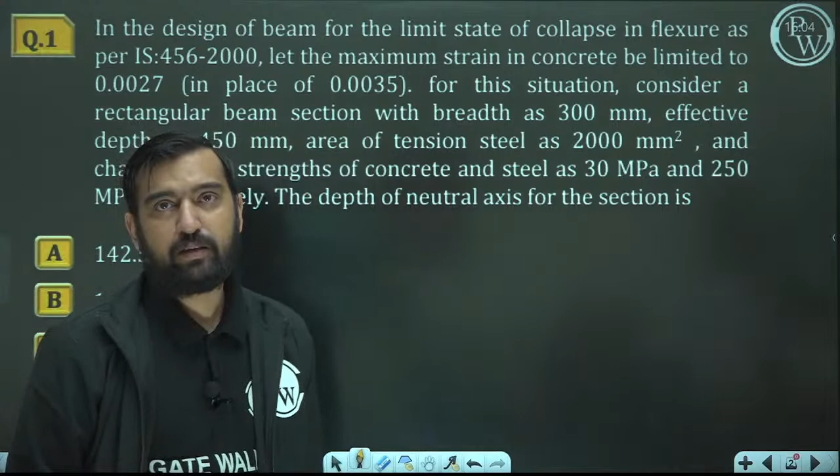Here is question number 1 on your screen. It says that in the design of a beam for the limit state of collapse in flexure as per IS 456-2000, let the maximum strain in concrete be limited to 0.0027. We know that originally, as per IS 456-2000, it is 0.0035, but instead now they have taken strain equal to 0.0027. For this situation, we have to consider a rectangular beam section whose width is 300 mm, effective depth is 450 mm, and tension steel is 2000 mm square. Characteristic strength of concrete is M30, means 30 MPa, and for steel it is Fe250, 250 MPa. Now they are asking, what is the depth of neutral axis?

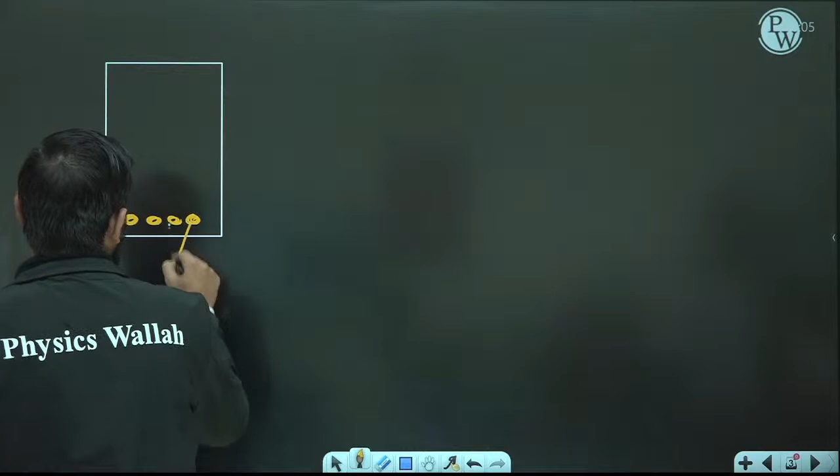So what they are saying is, we do have a rectangular section, and let's suppose we are having some area of steel. This area of steel is 2000 mm square. M30 is the grade of concrete and Fe250 is the grade of steel. Somewhere here let me have a neutral axis, and the strain diagram here would be like this.

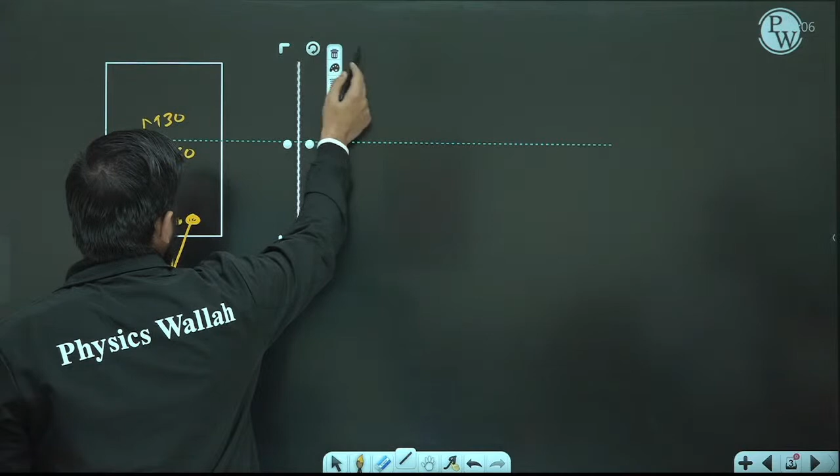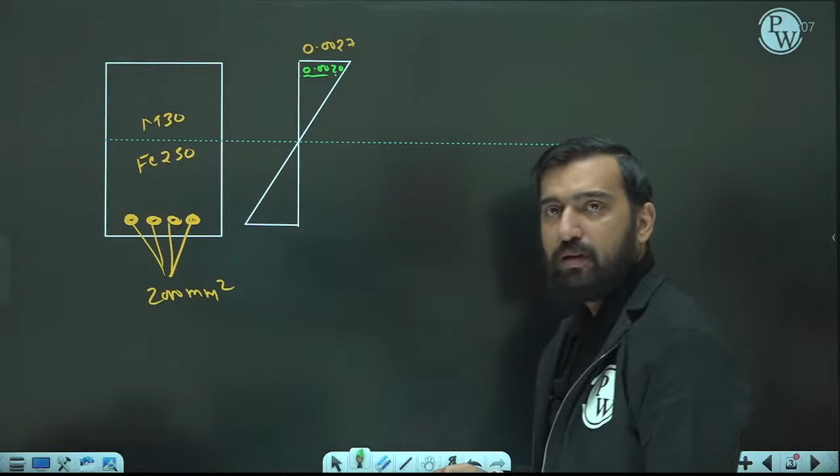So all other information we will keep the same; whatever alterations have been given, only that we are going to incorporate here. So no need to think much, only the changed thing I am highlighting here. And we know that the stress-strain curve for concrete is parabolic up to a strain of 0.0020, and for the remaining portion it is constant. So my stress-strain curve will look like this.

Now we know that for this portion we are going to have a constant stress of 0.45 FCK, and the rest of the things are same. So let me highlight here the stress, and that is equal to 0.87 Fy. Now friends, I need to find what is this rectangular block out of the total depth of neutral axis. Let's suppose if this is the total depth of neutral axis, then out of this total depth, how much fraction is under constant stress of 0.45 FCK, and how much fraction has a parabolic variation. So what can I do?

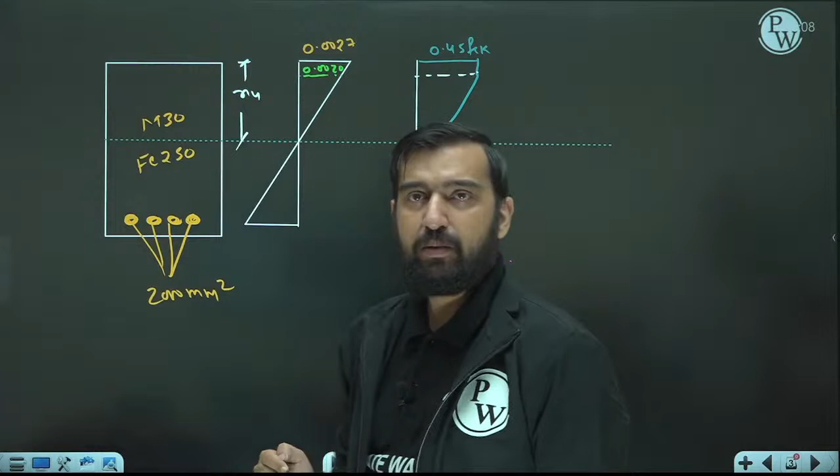If this distance is Y, then from the concept of similar triangles, I can write that 0.0027 upon XU is equal to 0.0020 upon Y. So Y is equal to 20 by 27 of XU. So this value is going to be how much? It is 0.741 of XU. Now what about the remaining depth?

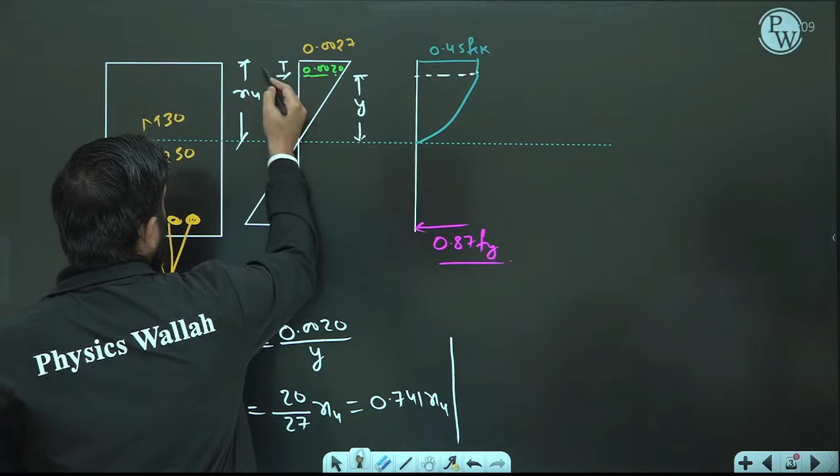So let's suppose the remaining depth is Y dash. So Y dash is equal to 7 by 27 of XU. So Y dash would be equal to how much? I hope you guys are keeping your calculator with you. It is 0.259 of XU. Now we have to find the neutral axis.

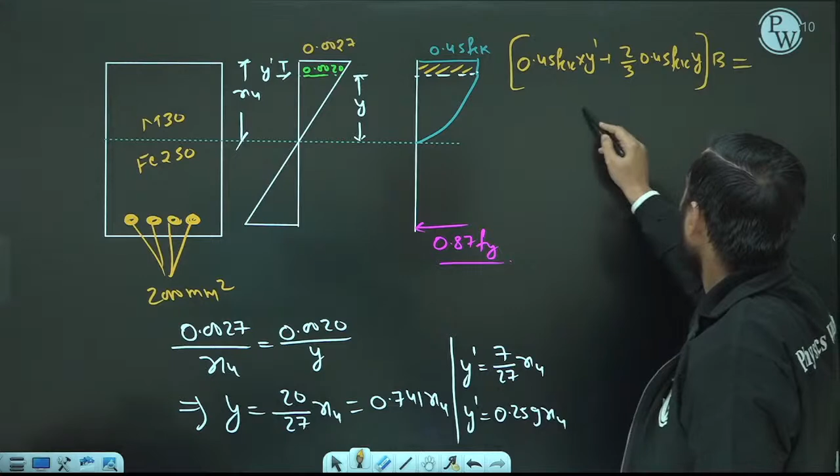How can we find the neutral axis? Just by equating compressive forces to the tensile forces. Total compressive force in concrete would be generated due to this stress portion, whereas the stress on steel is constant. So if I write the compressive forces equation, what is this area? This area would be the rectangle area 0.45 FCK into Y dash, plus this parabola area, which is a major portion of the parabola, 2 by 3 into base into height. So this entire area would be multiplied by the width of the section. This has to be equal to 0.87 Fy into AST.

So now solving this equation, we get 0.45 into FCK which is 30, into Y dash which is 0.259 XU, into B. B is given to you as 300 mm, plus 2 by 3 into base into Y which is 0.741 XU.

This is equal to 0.87, Fy is 250. Area of steel is also directly given to you. So my friends, on solving this equation, you would be getting here 142.66. So Xu on solving this equation, it is coming out to be 142.66 mm. Let me check with which option it is matching. 142.66, so it is best matching with option number A. So option A is the right answer.

Okay, so I hope no doubts are there.

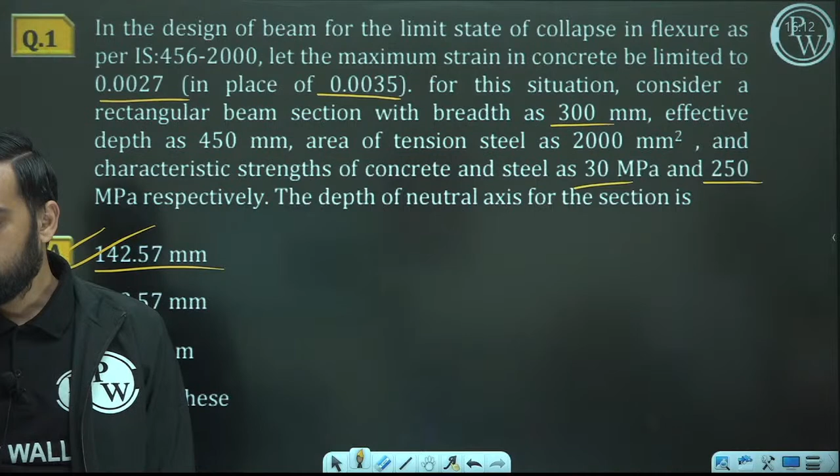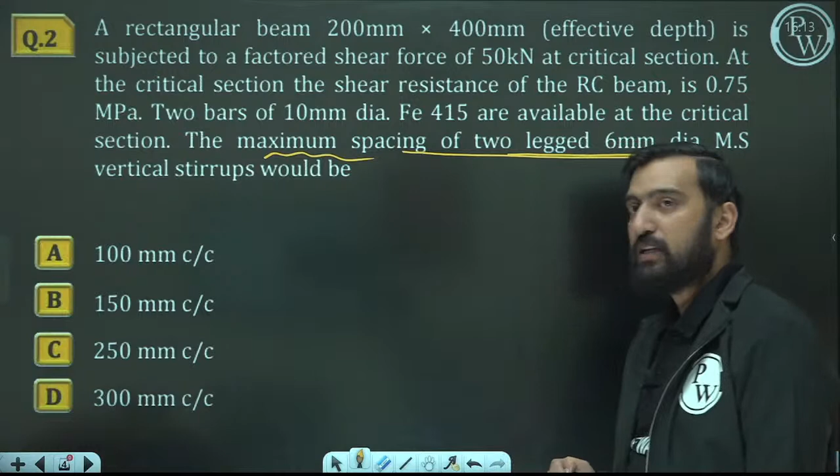So friends, the topic is shear, and the subtopic is design for shear. So here we have to see what is the maximum spacing of two-legged 6 mm diameter mild steel bars. So what all information is given to us? We are given the critical shear force. We are given the dimension of the rectangular section. We are given the value of tau c, that is 0.75 MPa. We are given the bar diameter of 10 mm, but these are your main bars' diameter, and Fe415 grade is also given to us.

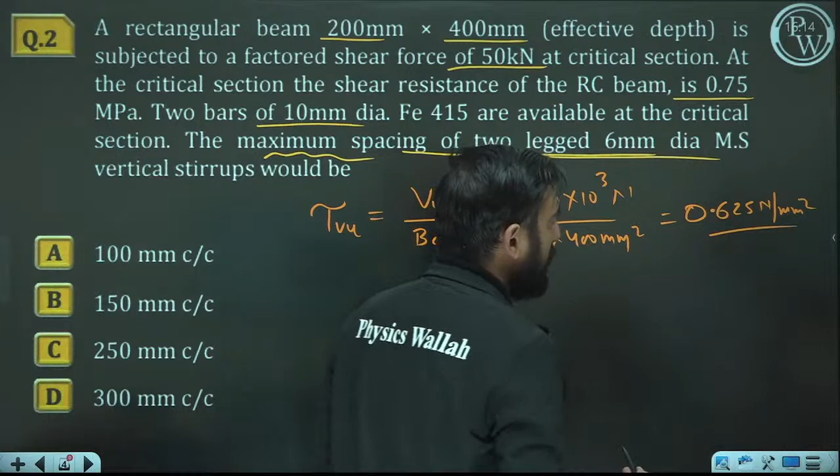So first of all, I would like to calculate here the value of tau Vu. What is tau Vu? It is shear force divided by BD. So the value of shear force which is given to you, it is already factored, and cross section is 200 cross 400 which is the effective depth. So total, my friends, on solving this, you are going to get 0.625. You can also cross check these calculations. I have done this calculation in advance, but I was only able to solve it once, so if you think there can be some calculation errors, I'll try that it should not be there, but you can also cross check my calculation.

So this is the value of tau Vu, and what is the value of tau c? Tau c value is given to you, 0.75 MPa. Here you can check that the developed value of stress, the developed nominal stress, or you can say average stress, is less than tau c. So theoretically we do not need shear stirrups, but yet we can provide some minimum amount of shear to take care of accidental torsions, shrinkage and all.

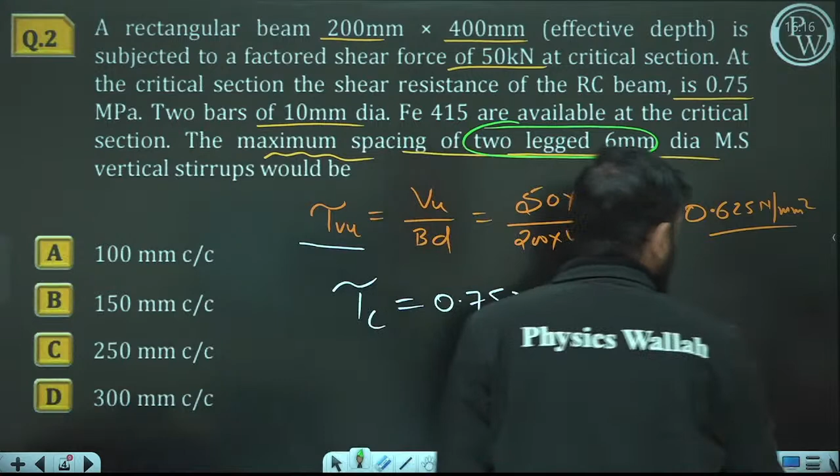So if I am going to provide that shear stirrups, because that provision is also given here, what is the requirement of shear? They have already provided 2 legs, 6 mm diameter mild steel stirrups. So now just see here, the spacing of the shear is going to be minimum of these things. First, 0.87 Fy ASV upon 0.4 times of B. Second, 0.87 Fy ASV D upon VSU. Third, 0.75 of D. Fourth, 300 mm.

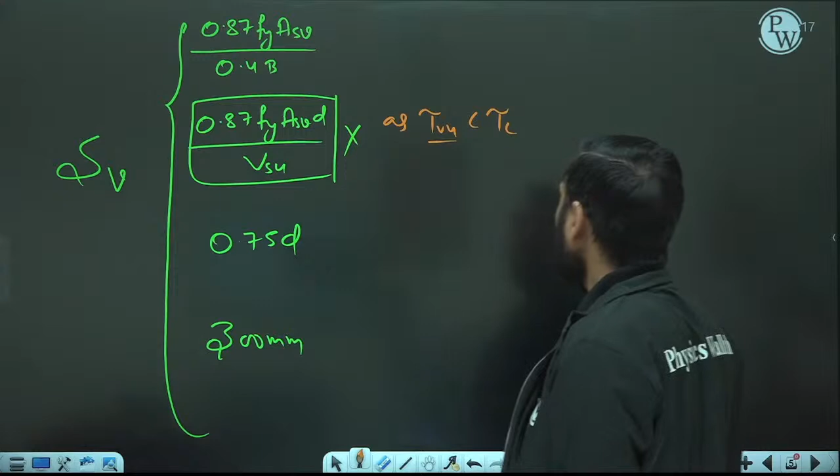My friends, this will not be required here. This will be required only if tau Vu value is greater than tau c. Had this tau Vu value been greater than tau c, in that case we would need to calculate this. Here we are not getting any excess shear force, so my spacing would be minimum of the remaining three: 1, 3 and 4. So it is minimum of these three. This one is not required to be calculated here. So this is 300 mm.

Not an issue. What is 0.75 D? D is given to you as 400. 0.75 times of 400 is again your 300.

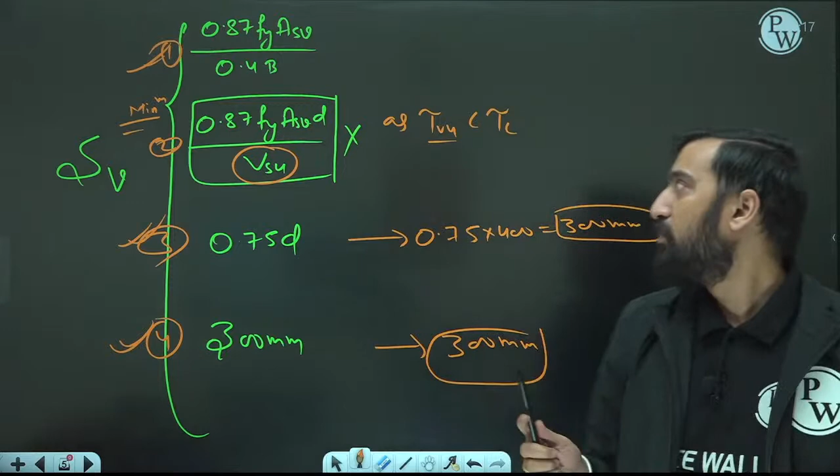Okay, so they both are same. Doesn't matter, you can pick any one. Now the whole thing would be determined based on this value. Now it is 0.87 fy.

Here usually students make a mistake. Generally whatever grade of steel is given here, that is for the main bar. But when it comes to vertical stirrups, there they have used mild steel. So do not put the value of 415 here, because the grade actually used for stirrups is mild steel.

It is not your HYSD bar. So what is the thing here? 250. What is the area of stirrups? 2 legged stirrups, what is the diameter of this? 6 divided by 0.4. What is the width of the cross section? Width of the cross section here is given to you as 200. So you are going to get this result in mm.

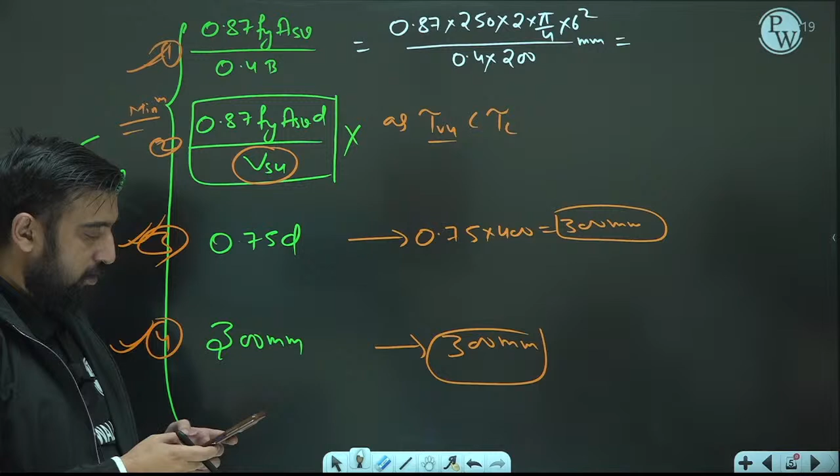So on solving this, what do you get here? I want to calculate it again: 0.87 into 250 into 2 into pi into divided by 4 into 6 square divided by 0.4 times 200. So value is coming out to be 153.74. It is coming out to be 153.74.

So you have to select this. So what is the nearest option which is matching? 153.74, and here you can provide your option B. You can provide this stirrups spaced 150 mm center to center. Okay, is it clear? So this you have to keep in mind, mild steel.

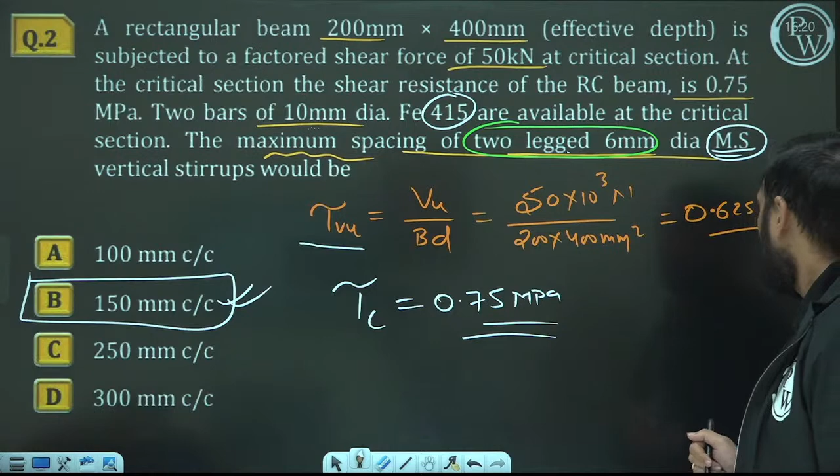So in small font they have written mild steel, but we should know that whenever such stirrups are being used, we have to use that grade of steel which is actually taken for the stirrups, not for the actual bars. If no information would have been given here, in that case you could have proceeded with 415.

Okay, next is question number 3. Question number 3 is again from your shear, and it is the checking for shear. Subtopic is checking of shear. So two beams have been given to you. A similar question was asked in GATE. So what I did, I simply interchanged the data.

We simply played with the data. So two RCC beams are there, P and Q, and they are provided with an identical cross section. What is the cross section? Cross section is 400 cross 750. And it is clearly written that this D 750 is effective depth, it is not the overall depth. We need effective depth only for the calculation of nominal shear. It is made with concrete whose tau C max value is 2.1 MPa.

And for the percentage of reinforcement and for the particular grade of concrete, the value of tau C observed there is 0.75 MPa. Design shear in beam P is 400, whereas in Q it is quite high, it is 750 kilonewton. Now considering the provisions of IS 456-2000, we have to select the correct option.

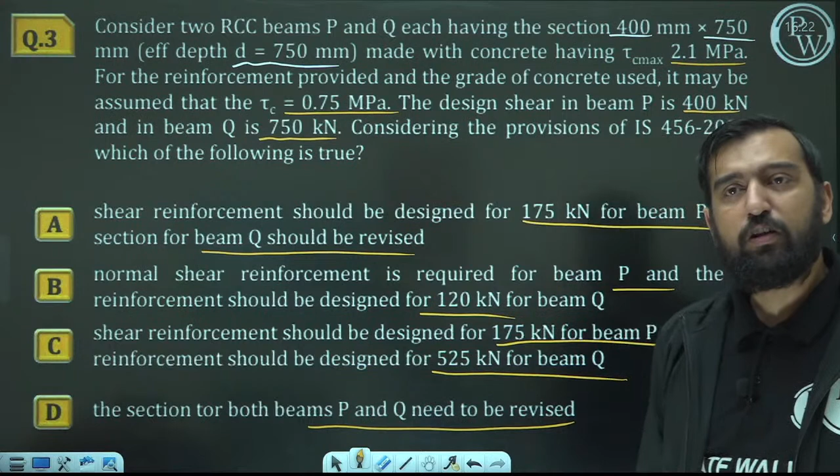So all we need to check is my nominal shear stress with the value of tau C and tau C max. What is the value of tau C? Tau C is the minimum shear strength of concrete, meaning without any shear reinforcement, what your concrete can take, that is known as the value of tau C. And with the help of shear reinforcement, what your concrete can take at max, that is known as the value of tau C max.

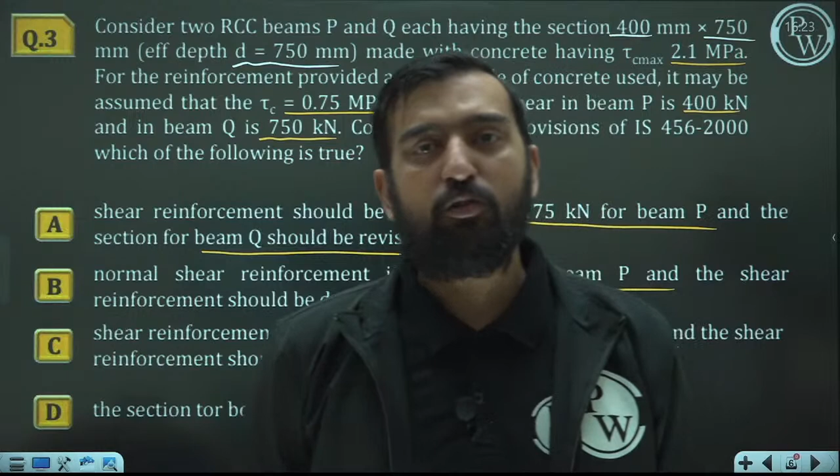So my developed value of tau v should be less than tau C max in any case, because if that value is going to increase, then we need revision on the section. And if the value of tau v is less than tau C, the minimum shear strength of concrete, in that case we do not need to design for shear, or we can provide minimum shear. We need to design our section for shear only if my value of tau v lies between tau C and tau C max.

Okay, so for that I have to draw the cross section of both beams. I need to find the value of tau v in both cases. Let's see which section needs revision or what are the consequences. Okay, so similar cross sections have been given to you. Let's suppose this is your beam P and this is your beam Q.

Dimensions are same. What are the dimensions? Dimensions are 400 by 750, 400 by 750. It is effective depth only, it is effective only.

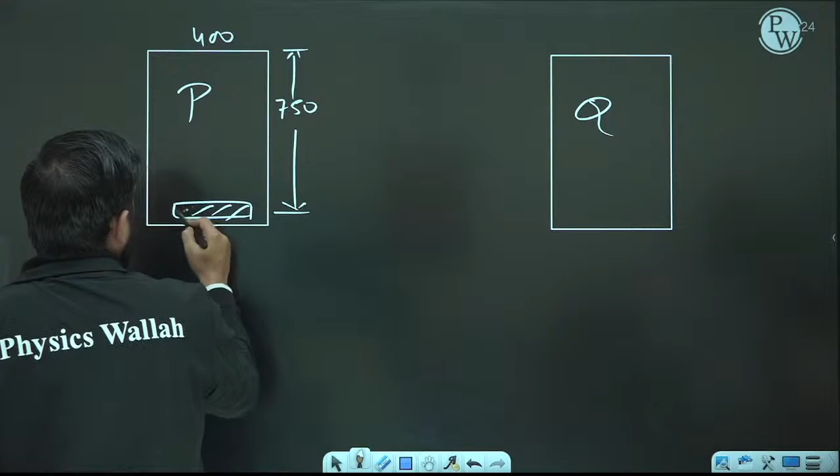Similarly here as well, it has to be effective only. It is 400 by 750.

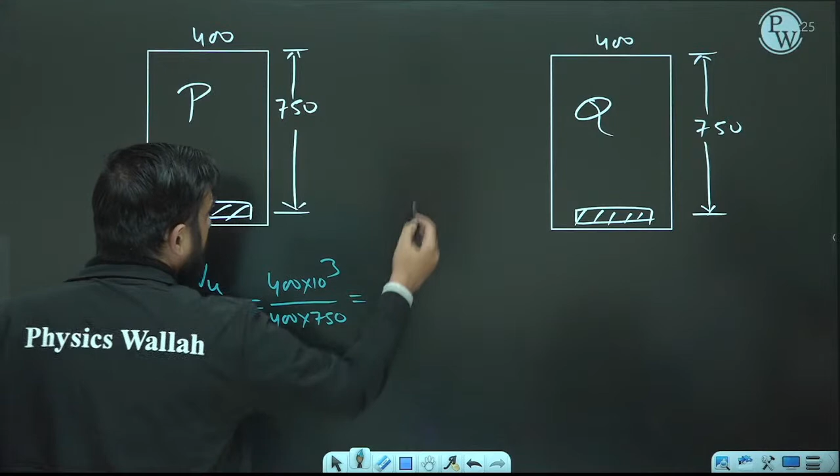What is the value of nominal shear stress here? It is equal to Vu over Bd. What is Vu? For P it is 400 kilonewton. What is B? 400. What is D? 750. So how much is it coming out to be? 1.33 MPa.

Similarly, if I calculate tau Vu here, it is Vu over Bd, that is 750 kilonewton over 400 by 750. So it is coming out to be 2.5 MPa.

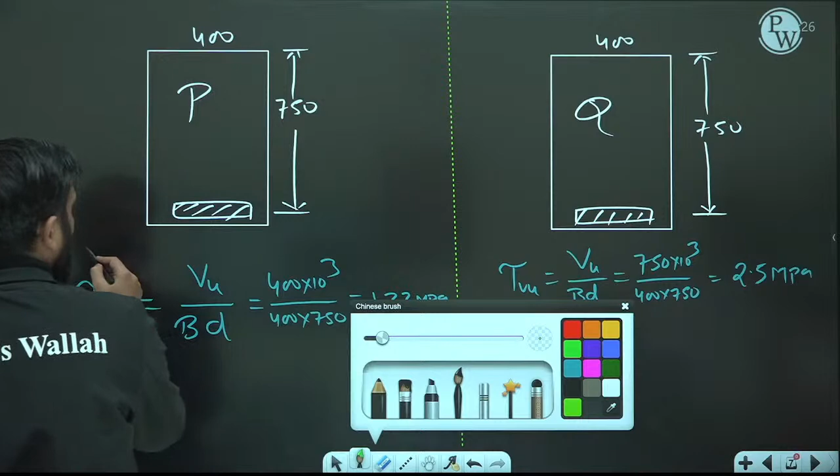Now what is the value of tau c here? The value of tau c is 0.75.

So in both of these cases, the tau vu value is greater than 0.75, meaning we have to design it for shear. And what is the value of tau c max? It is given as 2.1 MPa.

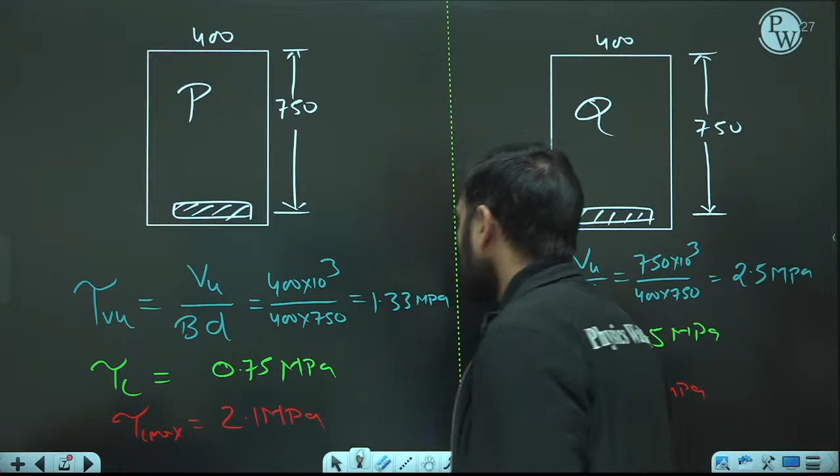Now my friends, judgment is yours. We cannot exceed the nominal shear stress beyond tau c max, and here tau c max is 2.1 while the developed value of stress is 2.5. So this cannot be designed. Section Q needs revision.

Let me check my options once again. Section Q needs revision. Here they are saying, and here also they are saying section Q needs revision, so these two you can blindly mark. Although they are also saying both these sections need revision, it is sure that P doesn't need any revision because it is still within the permissible limit.

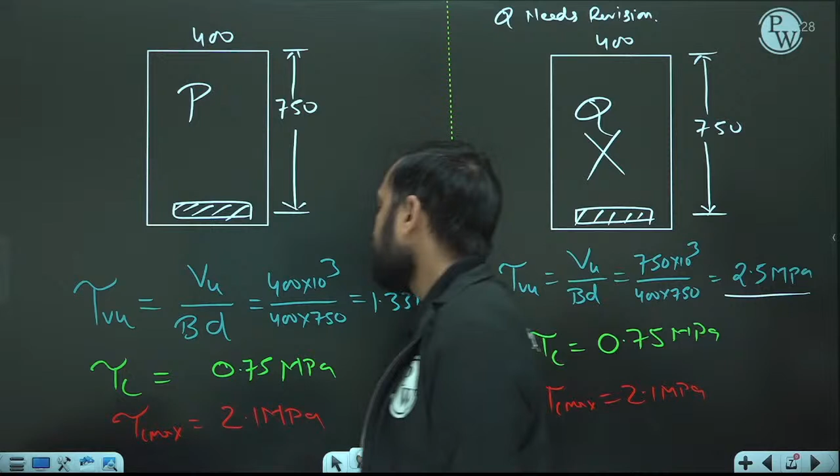But let me check it for option A, whether this is matching or not. Anyway, it has to match. So what is the value of excess shear stress? Shear force would be tau Vu minus tau C, multiplied by B into D.

What is tau Vu? 1.33. What is tau C? 0.75, multiplied by 400 into 750. This will give you the answer in Newton. Solving this, my friends, you would be getting 175 kilonewton.

It means option A is our correct option. That is, section P can be designed for 175 kilonewton for the excess shear force, and section Q needs revision.

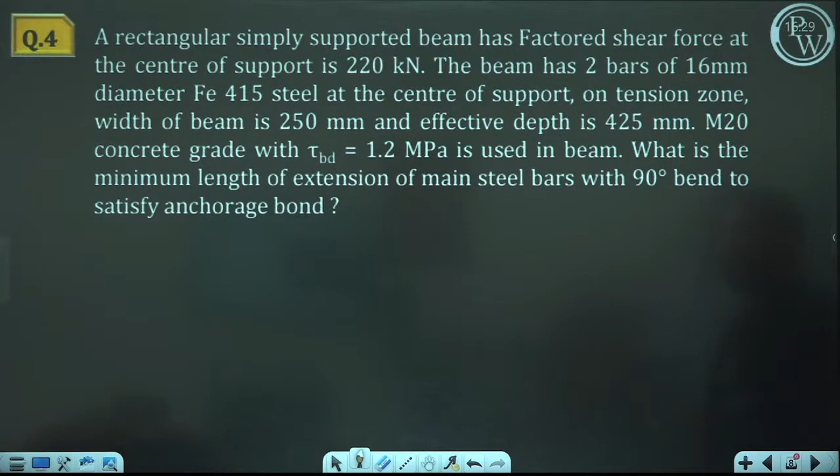Heading to question number 4. There is a rectangular simply supported beam having a factored shear force at the center of support equal to 220 kilonewton. This beam has two bars of 16 mm diameter, grade Fe415, at the center of support on the tension zone. Width of the beam is 250, effective depth is 425, and M20 is the grade of concrete.

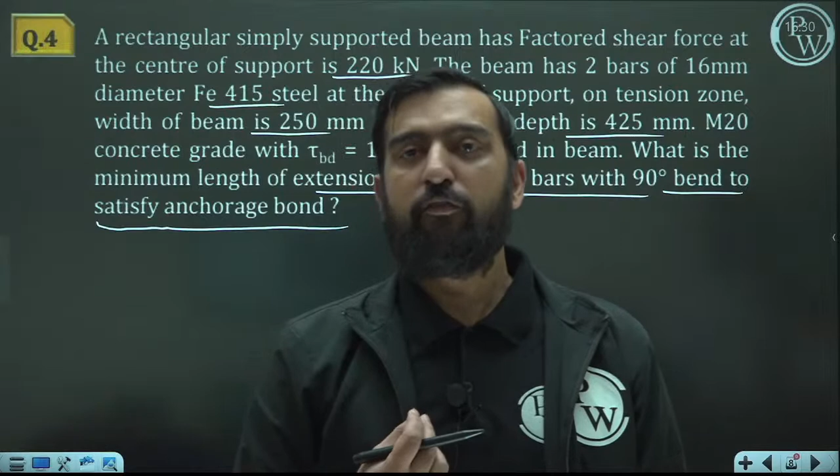Now what is the minimum length of extension of main bars with 90-degree bend to satisfy the anchorage bond? So the topic is bond and subtopic is development length. How much additional length do we need there? First, we need to find the total length required to satisfy the bond criteria. After that we will check how much we have provided and what additional requirement is still there.

If I calculate the value of development length, it is equal to 0.87 Fy phi upon 4 tau BD.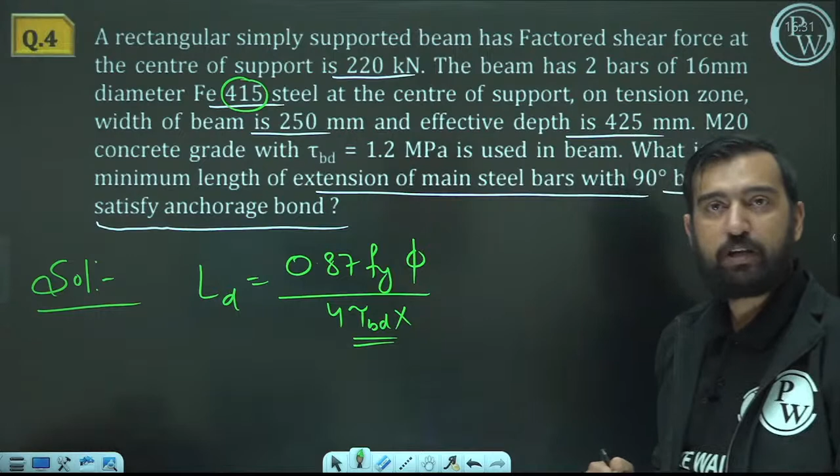One more thing, this tau BD value is used for plain bar in tension, but here the bar used is Fe415, which falls under the category of HYSD bar, and for HYSD bar we need to increase this value by 60%. Had this been a case of compression, it would have needed a further increment of 25%. But whenever we jump from plain bar to HYSD bar, it needs a revision of 60%.

Okay, so for M20, tau BD value is also given to you. So what is LD? It is 0.87. What is Fy? 415. What is the diameter? Diameter is 16 mm divided by 4 times of 1.2 into 1.6.

So what development length do you actually need here? On solving this you will be getting 752.187. This is what you need, this is the requirement.

Now it's time to check the availability. My friends, once again I am reminding you, please cross check my calculation with yours. I have solved them only once, that too in a hurry, and chances are there that these values are all right, but still there can be some discrepancy.

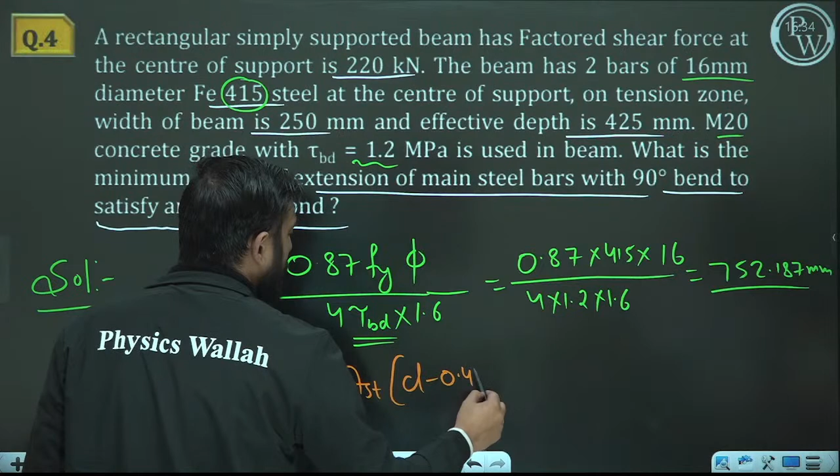What is VU? VU is your factored shear force, and it is directly given to you. It is 220 kilonewton. So if you are going to get the value of XU, then you can find the value of M1. For getting the value of XU, you can simply compare your compressive forces with the tensile forces.

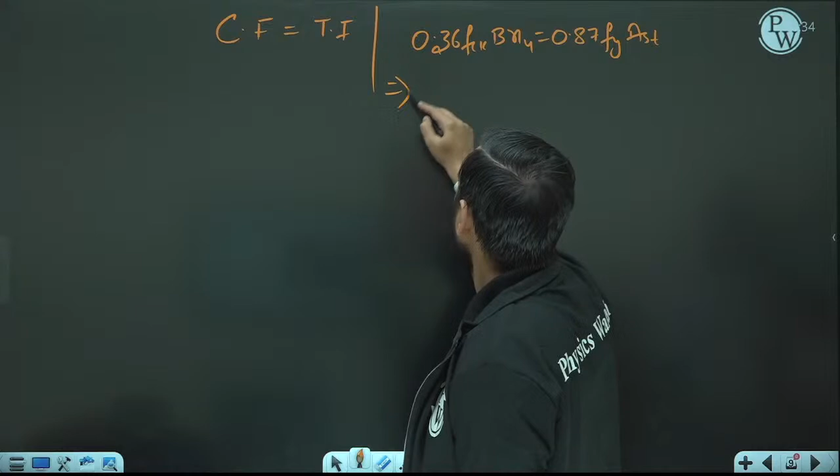So if you do that, 0.36 FCK B into XU is equal to 0.87 Fy into AST. XU is equal to 0.87, Fy is 415, and what about area of steel? There are 2 bars of 16 mm diameter, divided by 0.36 into FCK into B.

B is 250. So what is the value of XU? The value would be coming in millimeters, and this value is coming out to be simply 80.62 mm.

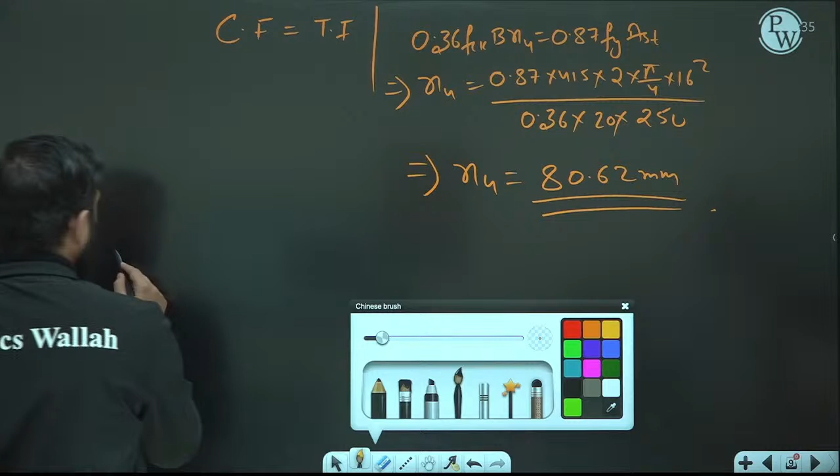Okay, now we can find the value of M1. M1, as I said, it is 0.87 Fy AST into D minus 0.42 XU. We were waiting for XU. Now it is 0.87, 415, 2 bars of 16 mm diameter into D. D was how much? 425 minus 0.42 of 80.62. This you will get in Newton mm.

So finally your M1 would be in Newton mm, but this would be in kilonewton meter. I have the answer, so I will write it in that form. It is 56.75 kilonewton meter.

This I want to recheck. Okay, dear. Thank you, Sarthak. So quickly let me recalculate this calculation.

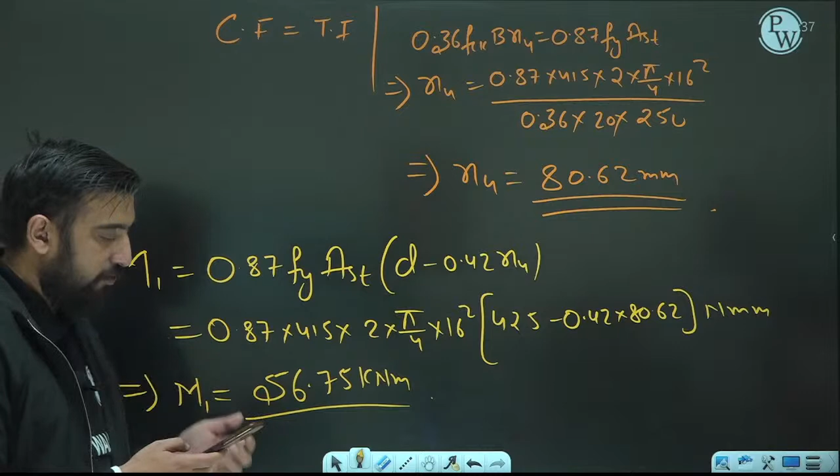0.87 Fy 415, and 2 into pi by 4 into 16 square, into 425 minus... I am getting 56.78, or let me write it in Newton mm only, because I need to substitute it there as well: 56,788,314.516 Newton mm.

Now what do I need to check? I need to check it for this condition. So here you can see that LD was coming out to be 752.187 in mm. So for the criticality condition, it is equal to 1.3.

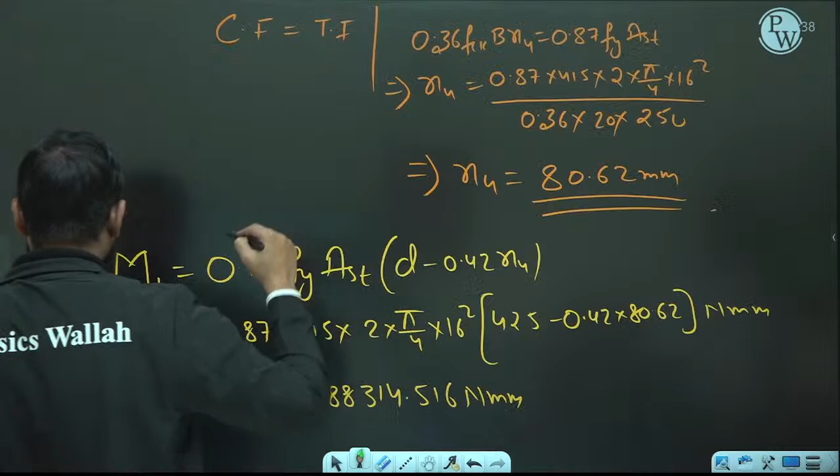What is M1? We just calculated 56,788,314.516, divided by what about VU? VU is given to you as 220 kilonewton, so I am making it in Newton, the numerator in Newton mm, plus L naught.

So first of all, let me calculate this. So this is coming out to 335.56, plus how much L naught is given to you?

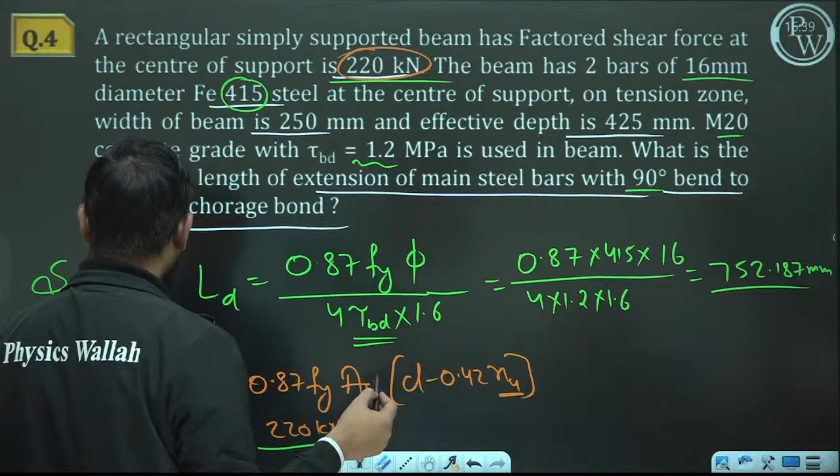L naught is the additional length. So what additional length have they used here? They have used a 90-degree bend, and for a 90-degree bend, what is the length available? For a 90-degree bend, my friends, you have 8 times of diameter. 8 times of diameter, what is the diameter? 16 mm, plus add-on length, let's suppose L dash.

So this is the condition: 752.187 minus 335.56 minus 16 into 8. So the value of L dash is coming out to be 288.627.

288.627. Yes, exactly. So with what is it matching? It is a NAT type question. So what is the additional length required beyond the center of the support? 288.627.

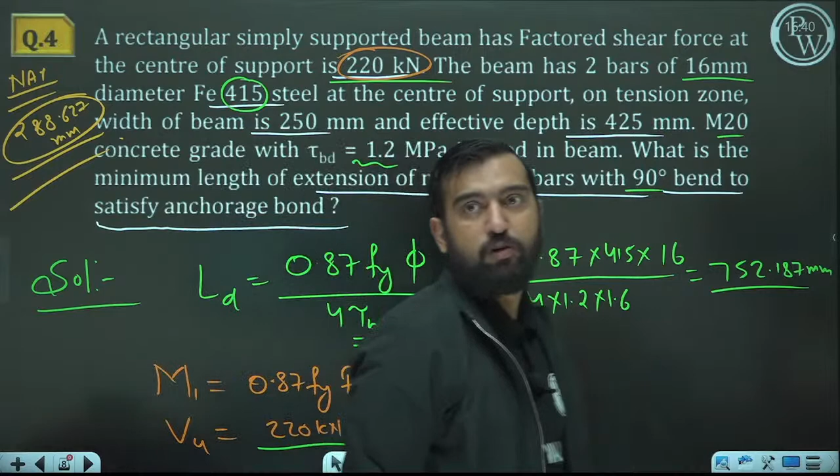This is also one of the good questions from the topic of bond. This question revises your fundamentals of development length. It teaches you how to get the value of length of embedment, and also makes you utilize the significant value for a 90-degree bend. If a hook would have been there, then it would be 16 phi; now it is 8 phi. And if that is also not satisfying, then what additional can be calculated? So multiple concepts this question is covering here. Is it clear?

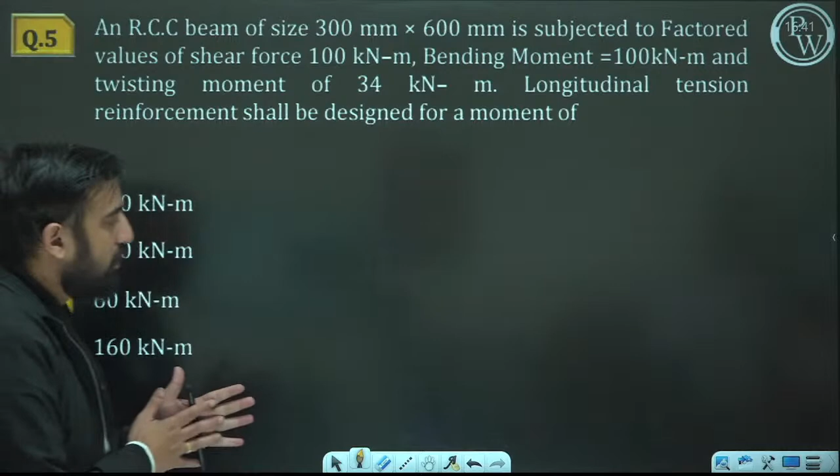Okay, so it's time to move on to our next question. Next question is from torsion. A RCC beam of size 300 by 600 is subjected to factored shear force and bending moment of 100. The shear force units are wrong here, it should be kilonewton only. Bending moment is 100 kilonewton meter, and torsional moment or twisting moment is 34 kilonewton meter.

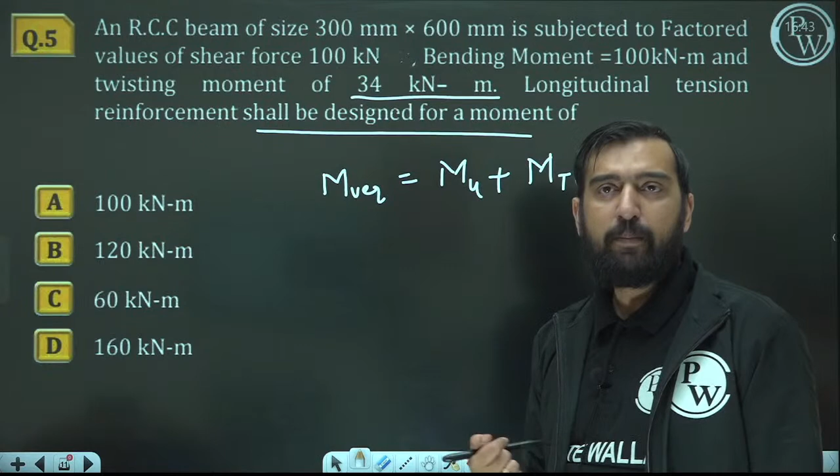So you have to find for what moment you need to provide your longitudinal reinforcement. All you need to calculate here is how you are going to find the equivalent bending moment. My friends, the longitudinal reinforcement shall be designed for Mu equivalent, which is equal to the original bending moment plus the converted portion of bending moment due to torsion. Let me tell you one thing: RCC is not a homogeneous material. So you have some conversion formula from your combined stresses chapter from strength of materials, but those expressions we are not going to use here due to the non-homogeneous behavior of concrete. So what are we going to use here?

It would be original bending moment 100 kilonewton meter. Anybody, what is MTU? MTU is TU over 1.7, multiplied by 1 plus overall depth to overall width. So it would be 100, and so the answer would be greater than 100 only. So this option and that option are already eliminated.

So when it comes to torsion of 34 kilonewton meter divided by 1.7 into 1 plus, what about overall depth? If nothing is mentioned here, then I can take it as overall. What about overall width? So 3 times we are going to increase it. So what is the value here? On solving it, my friends, you would get around 60. So 17 twos are 34, 20 into 3 is 60. So 100 plus 60, you need to get 160 kilonewton meter.

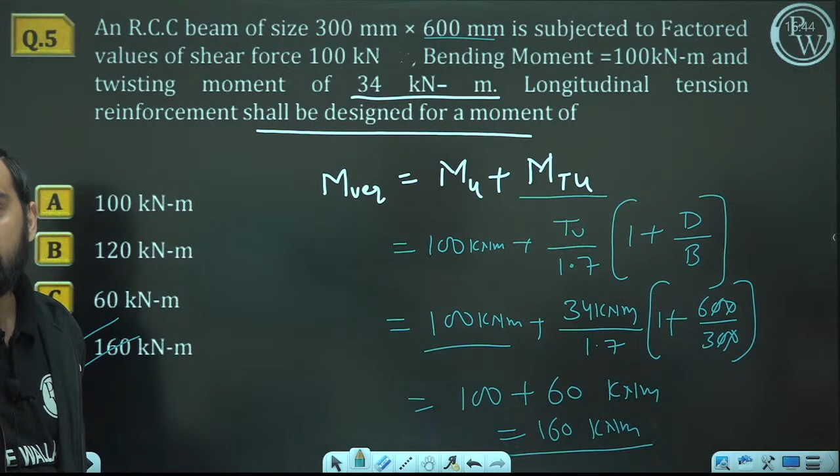So option D, here you have to select option number D. Is it clear? Okay, so let me move to the next question.

Next question is from column, column with helical reinforcement. Circular column with helical reinforcement. So the question is asking for the ultimate load carrying capacity of a circular column of 300 mm diameter with helical reinforcement, using 1% reinforcement, and grades M20 and Fe415. So with the helical reinforcement, my friends, I have to calculate the load carrying capacity.

Only one basic thing you guys have to keep in mind: whenever a circular column is supported with helical reinforcement, the load carrying capacity of the column increases by 5%. That is the recommendation from IS code. So whenever you have a spiral arrangement, you can think that due to the vertical component of helical reinforcement in the upward direction, the increment in load carrying capacity is 5%. Okay, what is normal load carrying capacity?

Normal load carrying capacity is 0.4 FCK into area of concrete - this is the actual stress at the time of collapse in concrete - plus 0.67 Fy into As, which is the developed value of stress at the time of collapse in steel. This is under normal circumstances, but if it is designed with helical reinforcement, then a 5% increment is there, so I am multiplying the expression with 1.05. So Pu is going to be 1.05 times this.

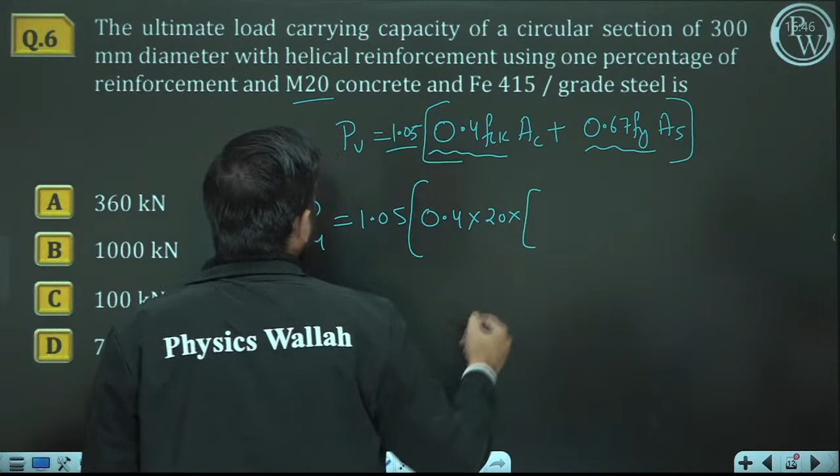What is the stress? FCK value is how much? It is 20. What is the area of concrete? Total area of cross section - it is a circular section, so it is going to be pi by 4 into 300 square, minus you need to subtract the area of steel from here, so it would be pi by 4.

It is 1% of pi by 4 into 300 square, because area of steel is considered as 1% of the total cross section, plus 0.67 Fy into 1% of the gross cross section. So friends, if you solve it, you will get 793.78 kilonewton. You guys can quickly recheck it, I think it is right. So it is best matching with option number D.

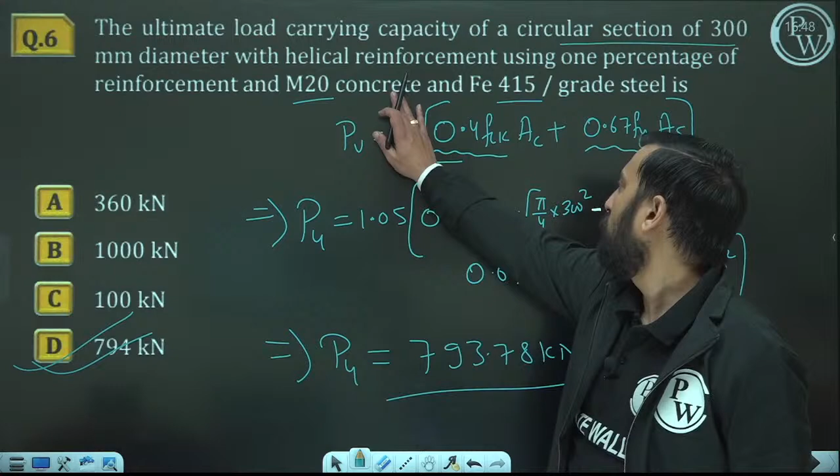So what things to be taken care of here? We have to read the word helical reinforcement very carefully. Whenever there is a case of helical reinforcement, the load carrying capacity of the column increases by 5%. Had this been a case of normal lateral ties, the answer would have been only due to this. Are you getting it or not? Okay, let me move to the next question.

Question number 7: what is the maximum stress in tension steel if crack is not developed? If crack is not there, that means the stress value is less than the permissible stresses. What is permissible stress in tension? It is 0.7 root FCK. So do you think grade is required here?

Let's suppose I start this calculation without assuming any particular grade of concrete. What is your flexural stress? It is 0.7 times root FCK. What is your Young's modulus of concrete? It is 5000 root FCK. Now when it comes to strain: if this much stress has to be resisted, take it as the upper limit, FCR upon EC. So stress over Young's modulus of concrete is nothing but the strain developed. This would be equal to - both are functions of grade of concrete, and in both terms root FCK is there. That is the reason why grade has not been given here. So this is the value of strain.

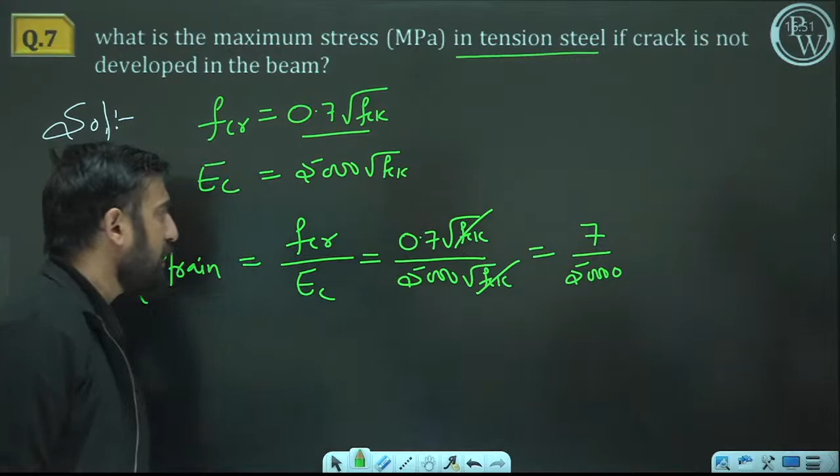But we have to find the maximum stress in the tension steel. In order to maintain strain compatibility, whatever strain is developed in concrete, the same strain has to be developed in the surrounding steel, because this is the surrounding concrete. So the stress in steel equals the same strain multiplied by Young's modulus of steel. So strain is 7 by 50,000 into 2 into 10 to the power 5. So it is 140 by 5, and the answer is 28 MPa.

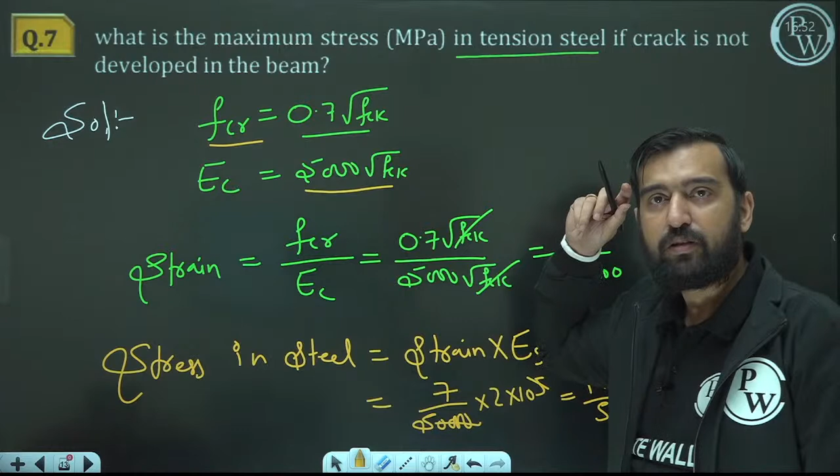Very beautiful question, very well designed question. No information is given on grade of concrete, no information on grade of steel. They are simply asking what is the maximum stress in the tension steel if crack is not developed in the beam. We should know that this is also known as modulus of rupture - the maximum stress which concrete can safely take before getting ruptured, that is FCR. This is Young's modulus of concrete, which is also a function of grade of concrete. Even I was confused when I read this question, I thought something is missing here. Although the final answer was matching, I thought by mistake I had forgotten to assign some grade. So very well designed question - 28 MPa.

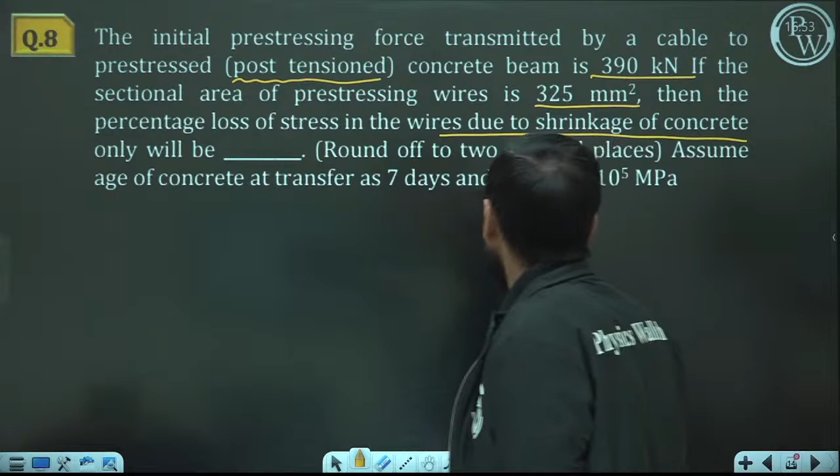Now it's time for pre-stressing. Now the question is from pre-stressed concrete. They are saying that the initial pre-stressing force transmitted by a cable to a pre-stressed concrete beam is 390 kilonewton, and it is to be noted that the mechanism used is post tension, and wire area given to you is 325 mm square. Then what is the percentage loss of stress in the wire due to the shrinkage of concrete? It is also given that at 7 days it is going to be transferred, and the Young's modulus, instead of 200 GPa, they are using 210 GPa. So we need to find the percentage loss of stress in the wire due to the shrinkage of concrete. Although I have the final answer.

First of all, my friends, you need to find what is the initial pre-stress. So initial pre-stress, let's suppose P naught, is equal to load upon area.

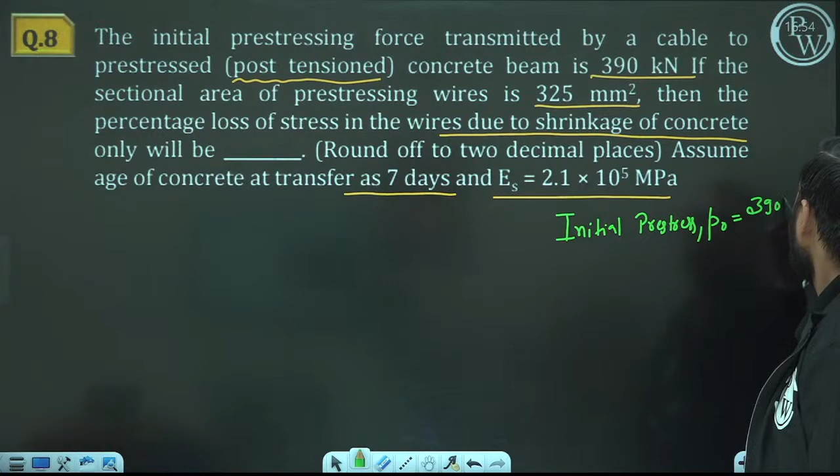So what is that value going to be? 390 upon 325, it is exactly 1200 MPa.

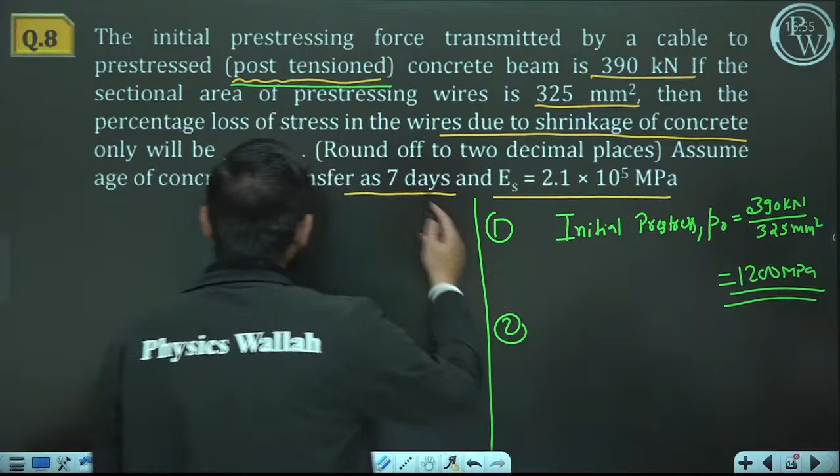Now you should also remember that if it is a case of post tensioned pre-stress concrete, what is the strain developed? What is the value of strain developed here? Shrinkage strain is given to you. If it would have been pre-tension, then directly we could have taken 3 into 10 to the power minus 4, but here it is post tension, so shrinkage strain is equal to...

How much? 2 into 10 to the power minus 4, some logarithmic function, log base 10 of t plus 2. So 2 into 10 to the power minus 4, and they need to transfer it at 7 days, so 7 plus 2. If you solve it, what are you going to get?

You are going to get 2.096 into 10 to the power minus 4. Let me recheck it. I forgot whether I used base 10 or E, that's why I want to reconfirm.

So log base 10 of 9. Yeah, exactly. 0.000209590. Okay, exactly, it is all right. Not an issue, it is all right.

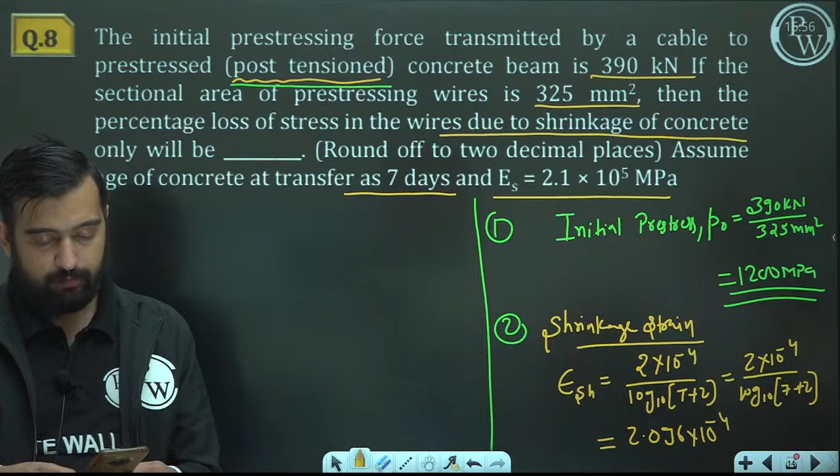Okay, next. What is Young's modulus of steel? This is the strain, so Young's modulus of steel is also known to you.

So what is loss in stress? Loss in stress is equal to 2.096 into 10 to the power minus 4 multiplied by Young's modulus of steel, and Young's modulus of steel is also given to you, that is 2.1 into 10 to the power 5. So this is coming out to be 44 MPa.

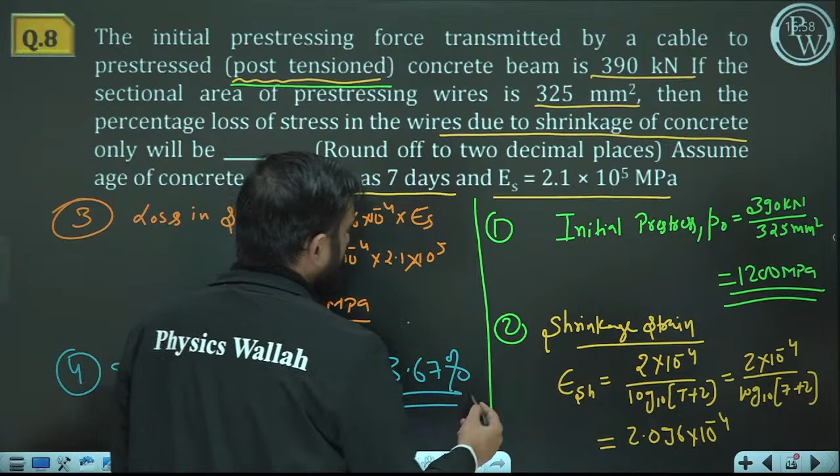Now the final step, percentage loss. Percentage loss is nothing but 44 divided by 1200 into 100. So answer is 3 point something, answer is 3.67. And let me tell you one thing, loss due to shrinkage is literally low.

Out of the overall loss, it is around 14 to 15% in post tensioned pre-stress concrete, and you can see that out of that 14-15%, only 3 to 4% is taken care of by losses due to shrinkage.

Okay, so next question. Next question is again from a beam whose cross sections are known to you. Effective span is also given to you. It is reinforced with 804 mm square and it is going to carry a total load of 16 kilonewton per meter on the whole span. The stress produced in concrete, and yes, this is a beauty.

They are asking the same question from the concept of working stress method. My friends, I agree that nowadays questions are not there in GATE from working stress method directly. But let me tell you, indirectly a lot of applications are still based on working stress method. That is the reason why I keep at least one question from working stress method in each of my sessions, because sometimes such modular ratio concepts they even ask in water tanks, sometimes in working stress method.

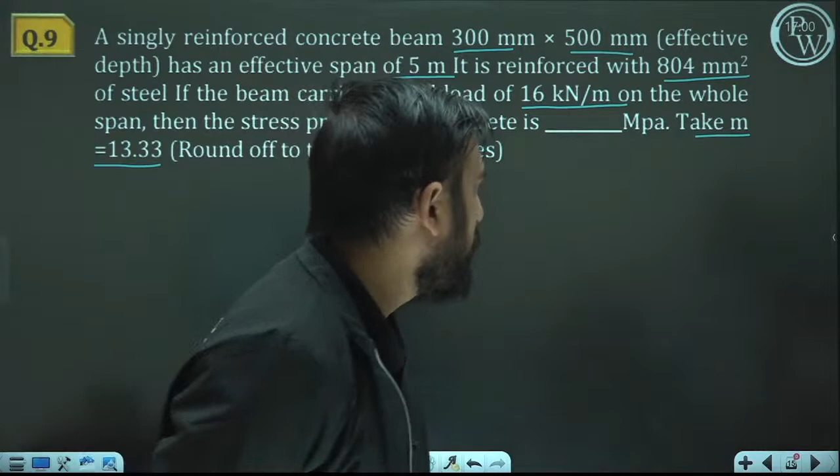Now they simply want to know what is the value of stress which is produced there. So first of all, let me ask you, what is the total bending moment there? It is WSM, so no need to do the factor. The load is 16 kilonewton per meter, and this beam is simply supported.

Is this information given to you? No information given to you. So by default we will be carrying it, taking it as simply supported. Let me add here: simply supported beam.

Because I have made the calculation as per simply supported beam, this is 16, and what is span? WL square by 8. So what is this? 50 kilonewton meter. This is 50 kilonewton meter.

So all we have to do is equate this bending moment with our moment of resistance, because this we have to prevent. This can be the maximum cause. If my moment of resistance would be equal to bending moment, then what is that? What is MOR? What is MOR?

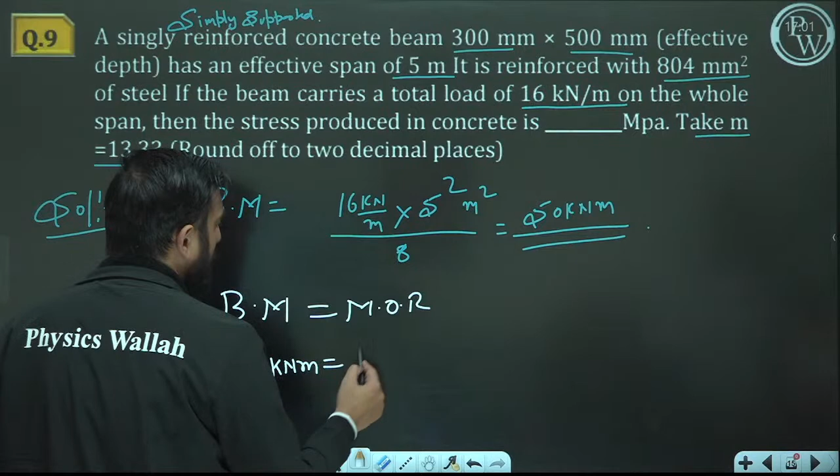It is sigma CBC by 2, or C by 2 into B into Xa into D minus Xa by 3. This is compressive force, this is lever arm. In working stress method, if this is my cross section, and if this is my stress diagram,

and let's suppose this is your compressive force, this is your tensile force, and this is acting at a distance of Xa by 3, then the lever arm would be D minus Xa by 3. But here, what about D minus Xa by 3?

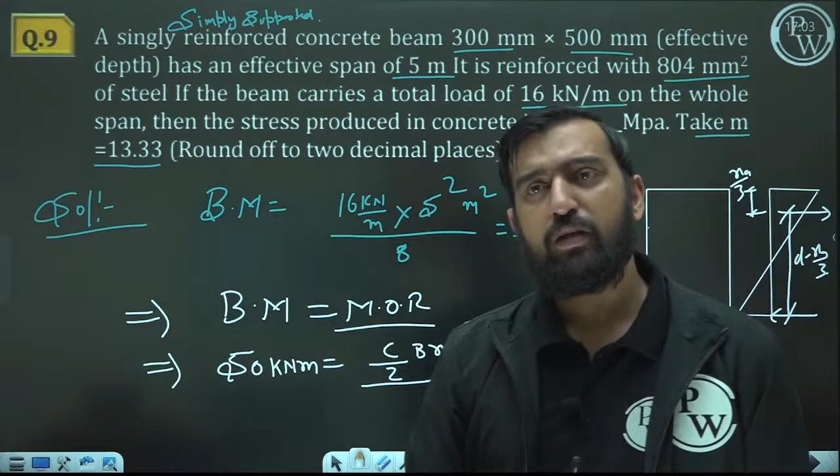So here we have to design it. What about lever arm? It is D minus Xa by 3. In order to get the value of lever arm, first of all you have to find the value of Xa. So how are you going to calculate the value of Xa?

Xa value can be computed simply either by equating compressive forces to the tensile forces, or when the stress diagram is linear, you can also equate the moment of area. They are one and the same thing. Moment of area about the neutral axis. So how are you going to calculate that?

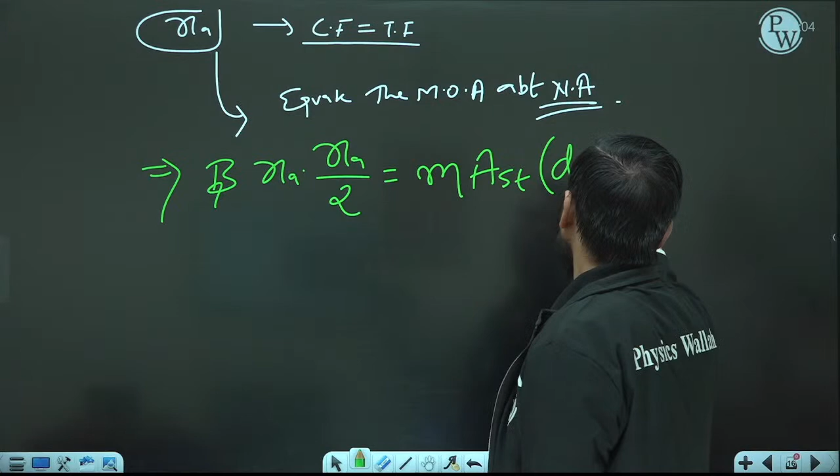It is B Xa into Xa by 2 is equal to m times Ast into D minus Xa. What about B there? B is 300. It is Xa square by 2, m is 13.33.

What about Ast? Ast is 804. What about D? D is 500. So this is a 2-degree equation: 150 Xa square plus 13.33 into 804 into Xa, minus 13.33 into 804 into 500, equals to 0.

So on solving this equation, you would be getting how much? Xa would be 156.63 mm. Now the same Xa you need to put here, and you need to find the value of 50 into 10 to the power 6 Newton mm.

C you need to find. B is 300, Xa we just computed, that is 156.63, multiplied by 500 minus 156.63 divided by 3. So here, let me set the order. When you will be using this PDF, this is my step number 1, this is my step number 2.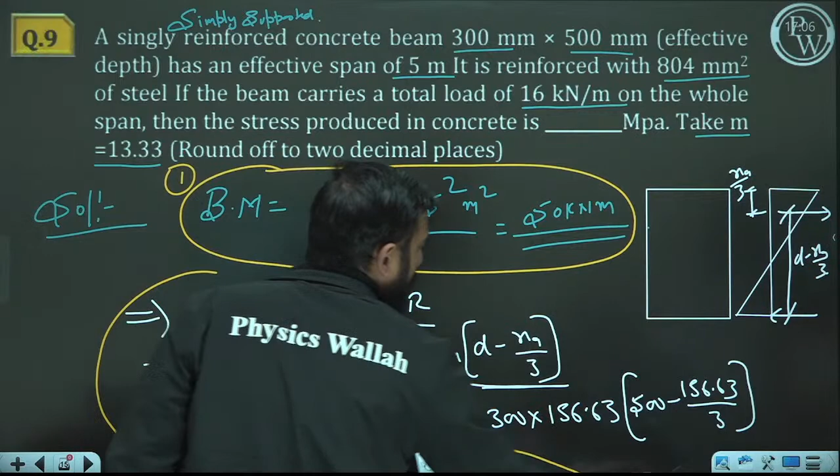After that I have to move to step number 3. So on solving this, you would be getting C is equal to 4.75 MPa, 4.75 Newton per mm square. So the answer would be 4.75. Maybe M15 grade they are utilizing.

Okay, so this is the developed value of stress. Are you getting it or not? So in the English channel, students are not much. Okay, so next question is question number 10.

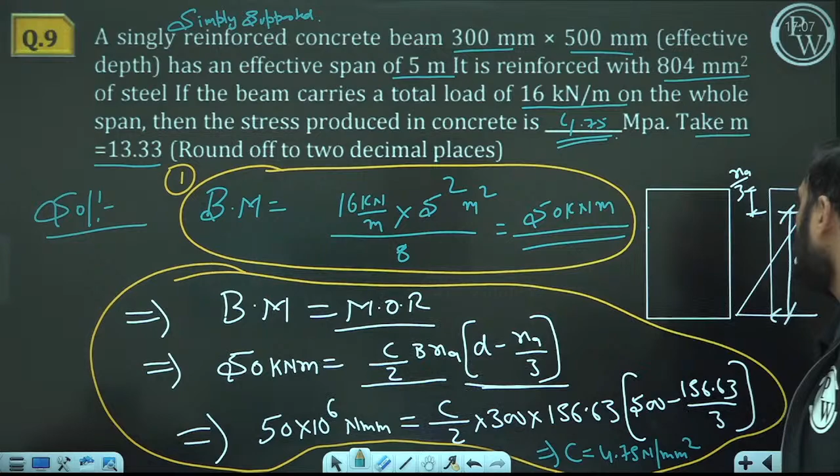Shear strength of concrete in RC beam is a function of which of the following? It is the function of compressive strength of concrete, and it is the percentage of shear reinforcement - no. It is the percentage of longitudinal reinforcement in the tension side - yes, this is also correct. It is the percentage of total longitudinal reinforcement - no, because this also includes compression.

So my friends, tau c is a function of grade of concrete as well as the percentage of tensile reinforcement. So maybe this is an MSQ type question, so here you can select these two: Option A, compressive strength means grade only; Option C, percentage of the longitudinal reinforcement in tension only. Please be reminded, compression reinforcement percentage is not used there.

Okay, next question. A trapezoidal combined footing for two axially loaded columns is provided. Good conceptual question - when do we have to provide the trapezoidal combined footing? My friends, trapezoidal combined footing will look like this. This is your trapezoidal combined footing. So they are asking when we need to provide it.

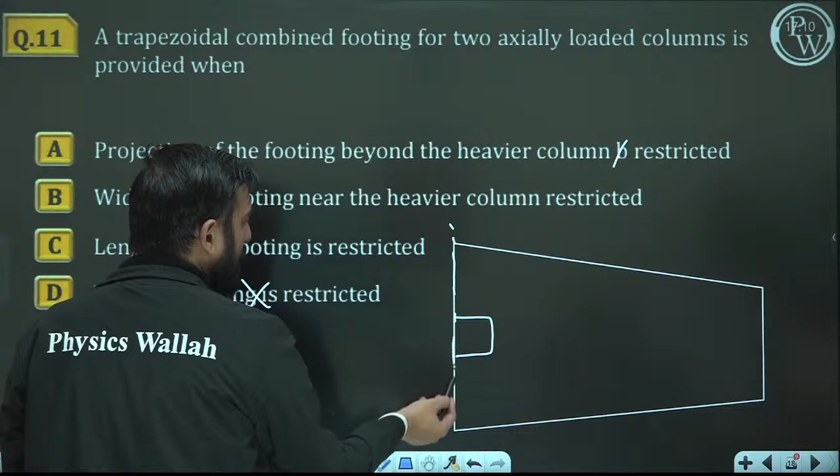First thing: the projection of the footing beyond the heavier column be restrained, is restricted. When width of the footing near the heavier column is restricted, length of the footing is restricted - length is no, this is incorrect because width is not an issue, you can extend it as long as you can. And projection of the footing beyond the heavier column - suppose this is your heavier column and here is your other column, so when you have a property line here, you cannot provide area there, so that is the reason why you are providing more width on this side.

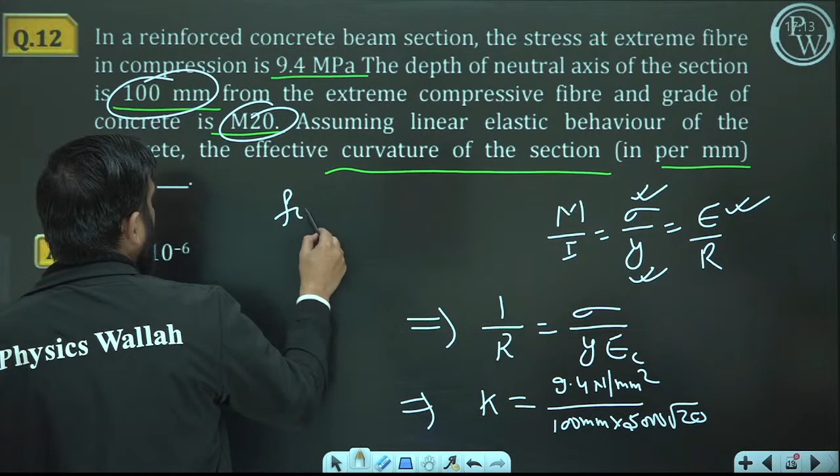All you need to know is the Young's modulus of concrete, it is 5000 root FCK. What is FCK? FCK is 20, since this is M20, so FCK is 20 MPa. Solving this, the curvature comes out to be 4.2 into 10 to the power minus 6 per mm. So option D can be matched.

Moving to question number 13: an RC slab simply supported on all edges as shown in the figure is subjected to UDL pressure - uniform pressure W of 12 kilonewton per meter square, or 12 kPa, is given. What is the maximum shear force per unit length along the edge AB? Along the edge AB, they are asking the maximum shear force.

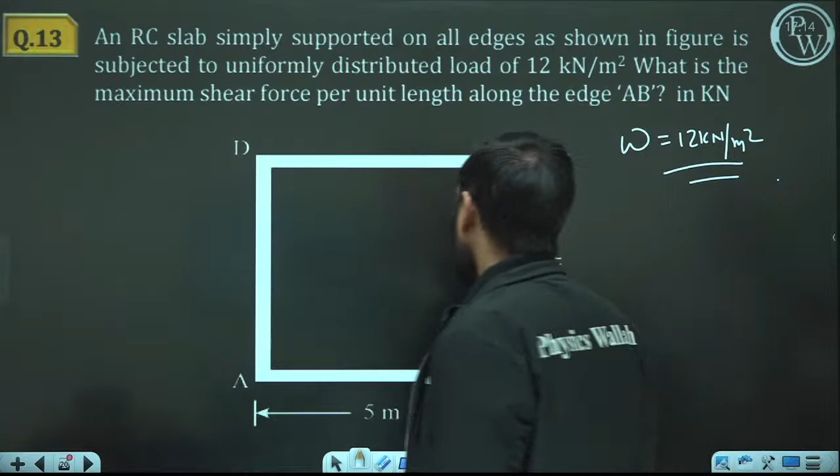This is the application of a two-way slab. How to calculate the maximum shear force in a two-way slab? Maximum shear force in a two-way slab is simply W Lx by 3, since 1/3 would be transferred. But W here needs to be factored, it's not 12. And Lx is the shorter dimension. So this is 18 by 3 into 4, giving 6, so the answer would be 24.

Maximum shear force here would be W Lx by 3. This pressure needs to be factored by 1.5, and based on that you calculate the value of VU.

You are quite late today.

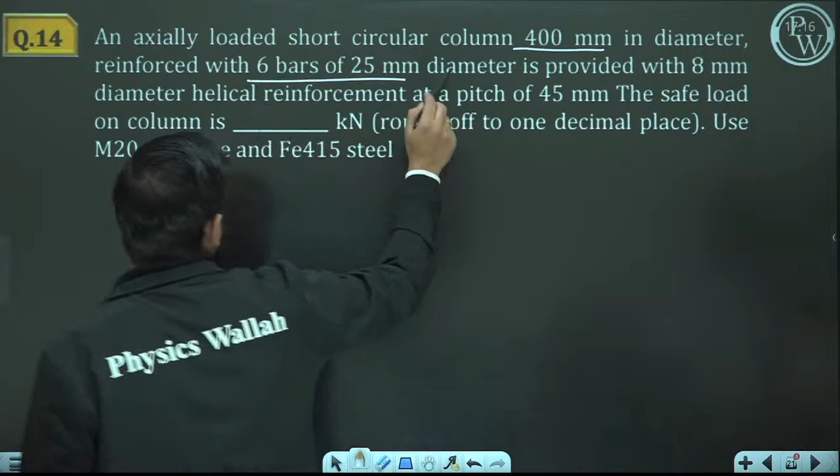Question number 14: an axially loaded short circular column 400 mm in diameter reinforced with 6 bars of 25 mm, provided with 8 mm diameter helical reinforcement at a pitch of 45. What is the safe load on the column? Only the pitch is given, just to make sure that they have provided helical reinforcement.

Safe load on the column is what they are asking. First of all, you need to calculate the ultimate load, then divide that ultimate load by the appropriate factor of safety. What was the value of PU? PU is equal to 1.05 times bracket 0.4 FCK AC plus 0.67 FY ASC.

Let me calculate this. I am using 1.05 because it is a case of helical reinforcement. What about FCK? FCK is 20. What about area of concrete? Area of concrete is pi by 4 into 400 square minus 6 bars of 25 square, plus 0.67 FY415, where FY is 415, into 6 into pi by 4 into 25 square.

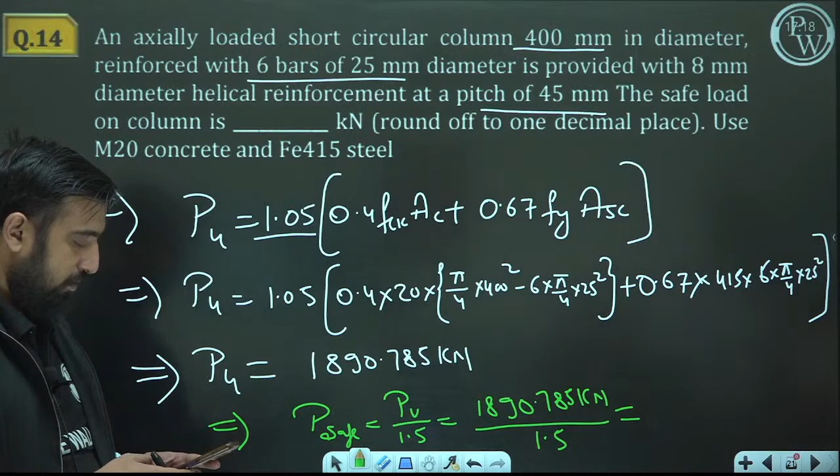So that is how much? 1 to how much it is? I'm not able to identify my own writing. Let me divide: 1890.785 divided by 1.5, so 1260.52 kilonewton. Rounded off, it's 1260.5. Is it clear?

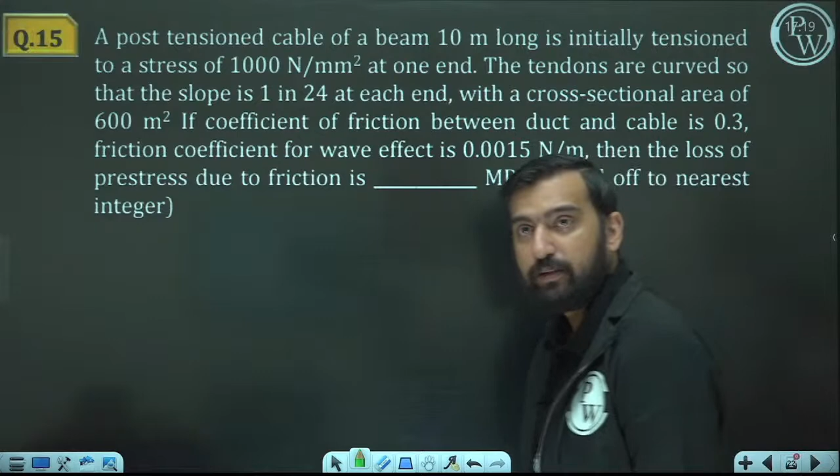Now last question of the session, my friends. I was expecting that it is from your pre-stressed concrete. So again the question is from post-tensioned pre-stressed concrete, and there is a cable of 10 meter long, and initial stress is 1000 MPa at one end. The tendons are curved so that the slope is 1 in 24 at each end. Means if this is your pre-stressed concrete beam and these are your tendons, they are having a slope of, let's suppose, alpha is simply 1 in 24. So they are being stretched from one side only, jacking from one end.

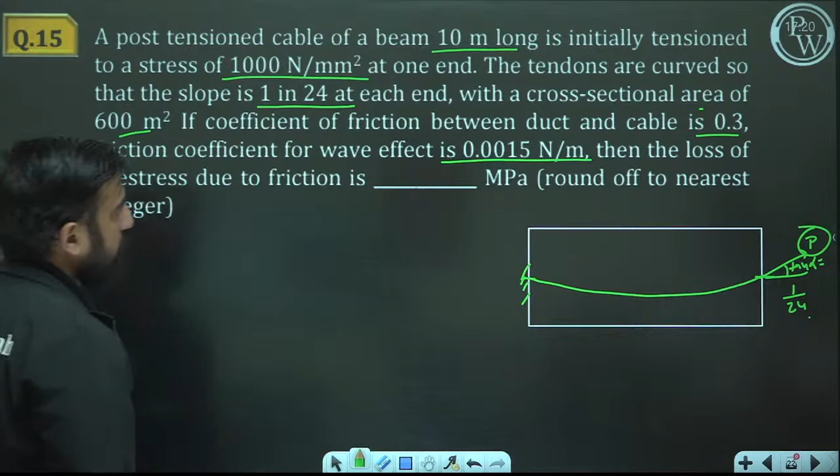What is the cross section given to you? 600. Coefficient of friction between duct and cable, mu value is given, and wobble correction factor is 0.0015 Newton per meter. Then what is the loss? Whenever they are asking loss, we always have to account the maximum one. So maximum loss will be accumulated here if jacking is done from one end, and if jacking is done from both ends, then it would be located at the center, meaning x would have been 5.

So loss equals initial stress times (kx plus mu alpha). Initial stress is 1000, k is 0.0015, x is 10, mu value is given as 0.3. Now what is alpha here? The total change in alpha would be with respect to this angle, so this is total 2 theta, so alpha is 2 theta here. What is theta? Tan alpha, or tan theta, is 1 by 24. So alpha is 2 times that, and angle is small here, so it's nearly theta only: 1 by 24, so total it is 1 by 12.

So on solving this, my dear friend, loss would be 0.015 plus... solve it, and you would be getting exactly 40 MPa. So no need to round, it is coming in exact figure. This is the answer key, this is the answer key.

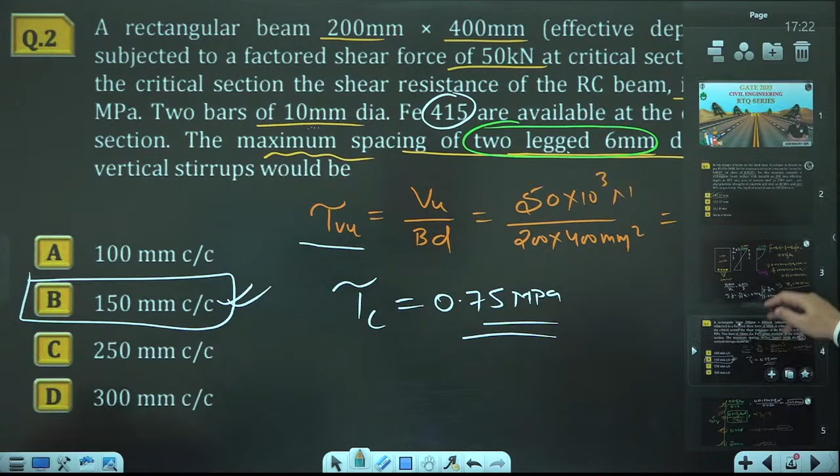So quickly we can check our answers: A, B, A, 288.7, A, B, A, and here 288.62, 288.7. First four we have checked.

D, D, 28.3 to 4, D, 28 — this one is my favorite in this series, this is my favorite. And what about this? 3.67, 3 to 4, 3.67. So up to 8 we have verified.

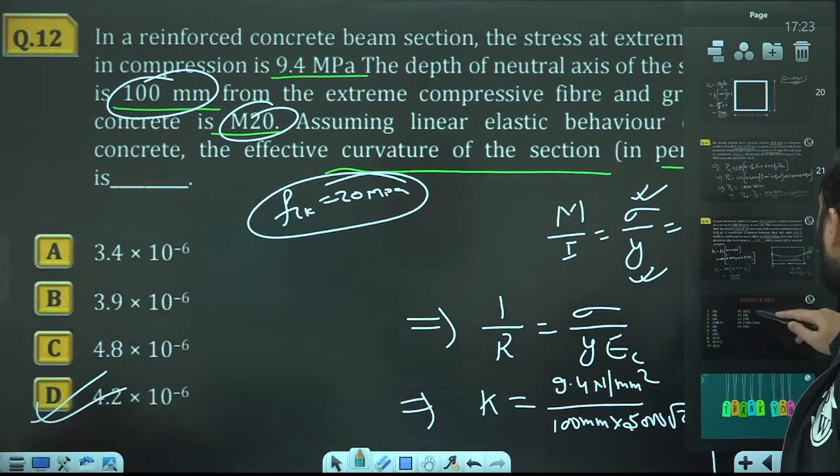Now 4.5 to 5: A, C, D. 4.75, A and C both are correct. This D is also correct. After that 24, 12, 60, 40 or 40, 12, 60 and 24 exactly.

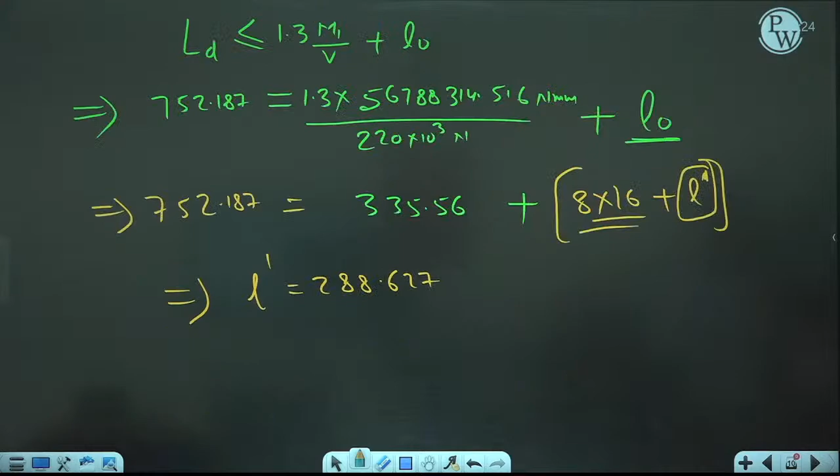I'm quickly following the entire slides so that in case you are not receiving PDFs and all, you can get it. So I am on one side: first question continued, second question continued, third question continued, fourth question continued, fourth continued, fifth question, sixth question, seventh question, eighth question, ninth continued, 10th, 11th, 12th, 13, 14 and 15. And this is your answer key, you can match it.